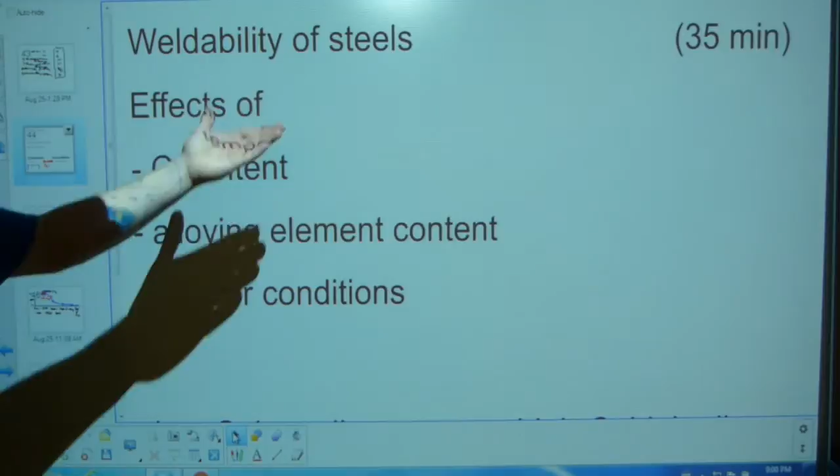In this video I will briefly review the major factors that affect the weldability of steels. I said briefly, even though it's more than half an hour, a little bit of video. Thank you very much in advance for your patience. I will make your time worthwhile here, okay?

I've got some interesting insight here to share on the weldability of steels that will save you a lot of headaches, okay? However, this is neither a 4-year degree in metallurgy nor a course of any kind. This is just a single half an hour.

To make the most sense out of this half an hour, I'm going to use two things here. One is standard symbols from the periodic table of elements that are the same everywhere worldwide, and I'm going to refer to some steel numbering system, and it's North American. However, wherever you are on Earth, whether you're familiar with the Russian steel numbering system, or the Swedish, or the British, the French, the German, the Japanese, or the Chinese, or Australian, it doesn't matter, because once you're familiar with one, you can fairly easily relate to this North American system. And I'm just going to use a handful of those terms, okay, and it's going to make sense.

And I have a table and a half of steel samples set up over there that we can look at and spend 5 minutes on, just to make sure we're all on the same page, okay? So, as the title suggests, let's get started.

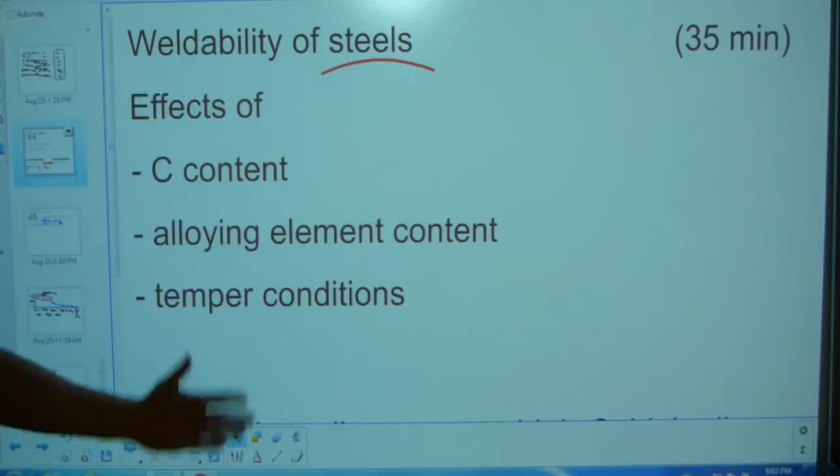Second, what do I mean by weldability? Aren't all steels equally weldable? Absolutely not. There are hundreds of steels out there in the world, and there could be, I don't know, 500-800 different types, and just because you welded one out of these hundreds, the other 799's weldability is completely different from the one that you actually welded.

What you probably welded, if you welded in high school or you weld at work, is ASTM A36 structural steel, or in SAE terminology it's a 1025 mild steel. Like I said, I'm using North American commercial terminology. SAE is Society of Automotive Engineers, and AISI is American Iron and Steel Institute. They developed this terminology in the 1930s and 40s and standardized it, so that's what I'm using. I will walk you through it in a sec.

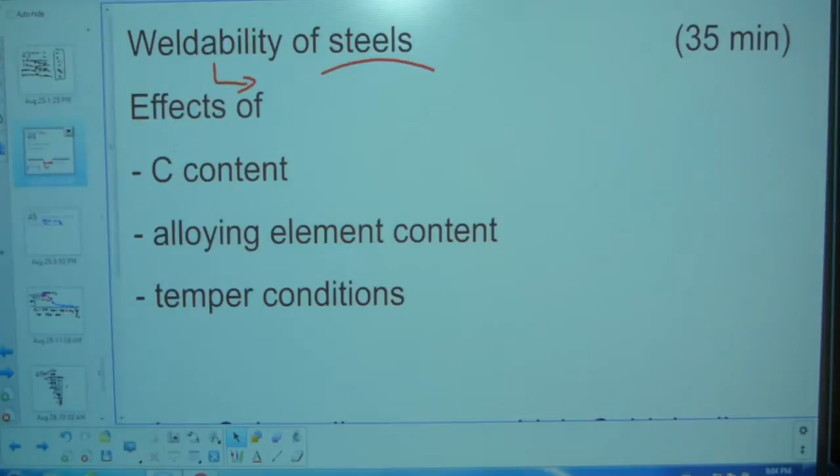So in one word, yeah, all steels have different weldability, and in one word, what's meant by weldability is strength. The strength of the weld being produced. Is the weld as strong as the materials being joined together? That's what's meant by weldability. In some cases, the weld is even stronger than the metals being joined together, depending on the skill of the welder and the electrodes and this and that, okay?

And in some cases, likewise, the strength of the weld that joins the material together is worse than the materials being joined together. Now, that's not necessarily a bad thing. If a weld is for cosmetic purposes only, it's still a valid reason. If there are no great stresses or loads placed on the welded part, a cosmetic weld can work fantastically well, such as holding oil in an oil pan. Oil isn't too hot and it can work fantastically well if it's a cosmetic weld, like I said. But what's meant by weldability is how strong is it in comparison to the base metals welded together? Alright, so that's what weldability is.

So that also means that in this video I'm not discussing welding technique or welding skills or how to choose the right electrode, how to set up the volts and amps on your welder, or how to apply the shielding gases. That's the technique of welding, and this is the material science or property of material weldability. Alright, so this is only going to be about weldability.

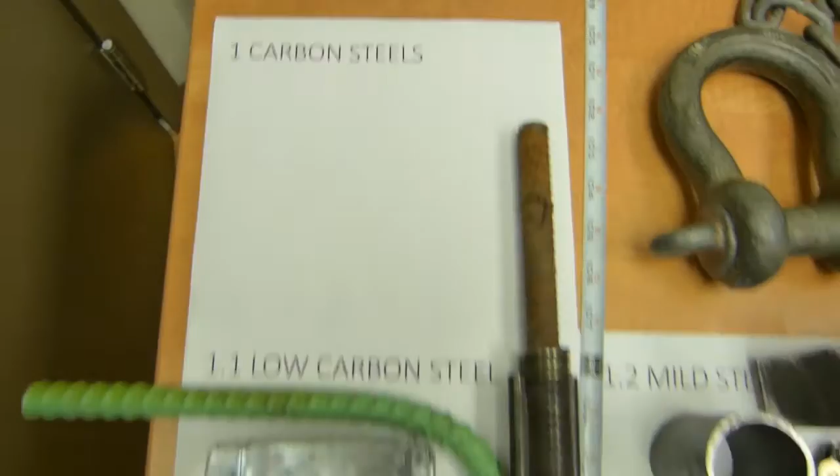So, before we get going with carbon content, let me show you this terminology related setup here. Come on off the tripod and we'll walk over there. Yonder corner in the classroom, we've got this setup here. Carbon steels is the first group here, and in this group there are low carbon steels, mild steels or structural steels, medium carbon steels, and high carbon steels.

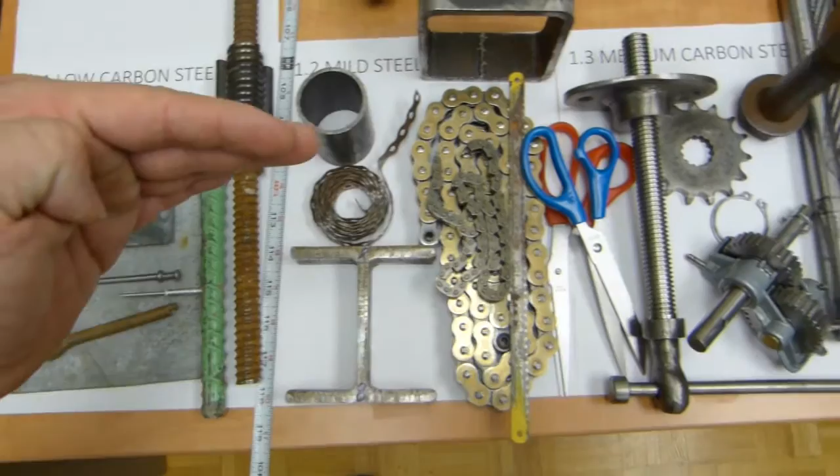That's what it says, high carbon steels. In these groups you can see what kind of items are being made of this stuff. In these groups, carbon content evenly and successively increases. So starting at very nearly zero carbon, going up to about 1.2%.

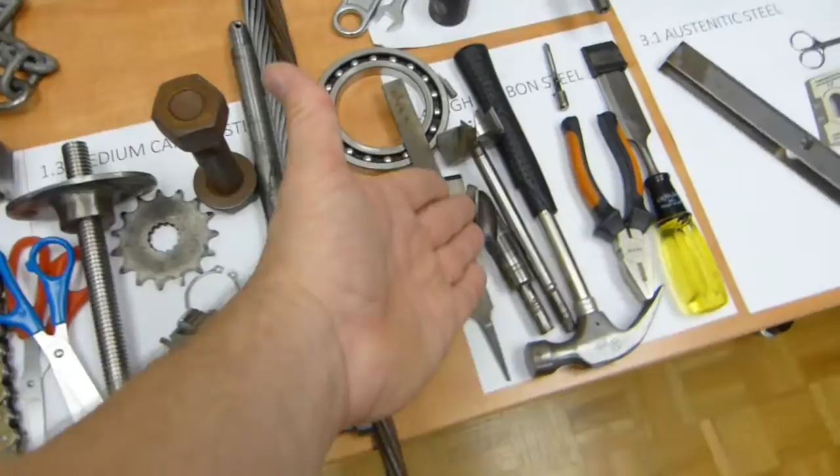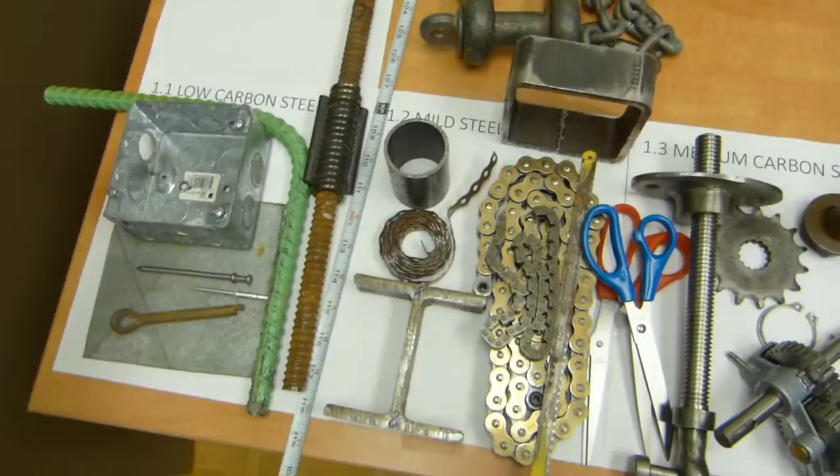Technically, anything up to 2.1% carbon content is defined as steel, but past 1.2% commercially nobody makes anything. Okay, between 1.2 and 2.1%. So that's where the high carbon steels pretty much top out. So the difference, other than the difference in material properties of the steels that this increasing carbon content from 0 to 1.2% produces, is quite dramatic.

Here the lowest carbon steels are meant to be bendable and flexible, and you can make these boxes that you bend the metal and crimp it back and it doesn't break, and you can work it with tin snips and hand tools, and these parts are made to be bent without cracking out where they are being bent, and they work fantastically well for that purpose. These steels here, hollow structural steels, channels, L's, pipes, I-beams, everything, you can't cut it with a tin snip anymore. You need power tools for this one, really. You can try a hacksaw, but good luck with that. So these are stronger as they have more carbon content in them.

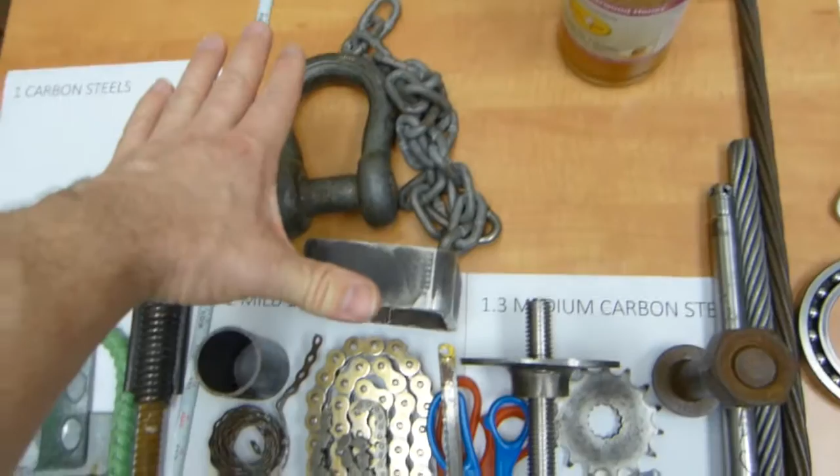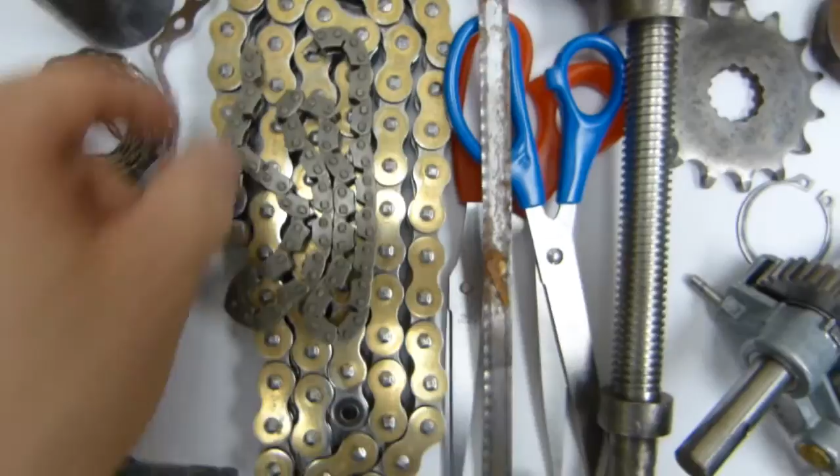They are still welded, such as the welded chain link here, obviously welded in the middle, but they are also bendable enough so they can put a tight radius turn on this one, and it still doesn't crack out where it's being bent. Now that's the cheap chain. There are also alloy chains, made out of alloy steel, but they start at this carbon content pretty much. And they can make this other kind of chain known as roller chain with these pressed plates and pins together.

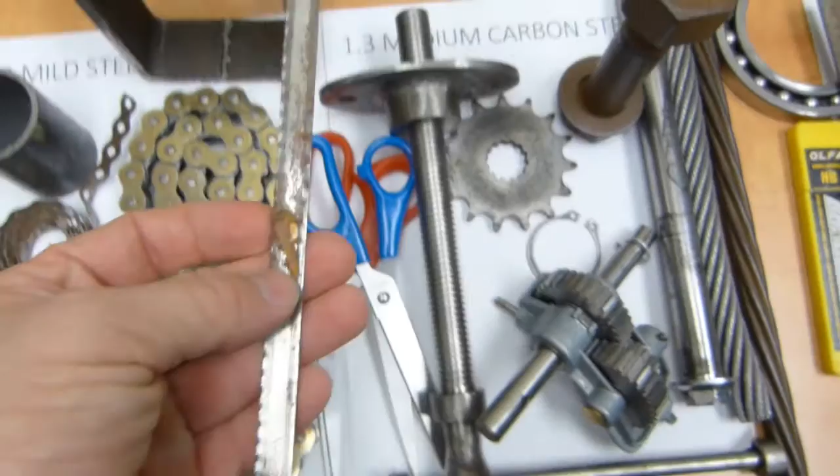You know, these need power tools to work on, and these steels are stronger, that's why they are structural, than these. This is sheet metal ductwork for the overhead air conditioning, that kind of stuff, and this is for gutters and that kind of stuff. It's also galvanized. Over here, as carbon content increases, that's a hacksaw blade, but bandsaw blades are in principle similar enough to hacksaw blades. These blades are welded together. These can be welded. You can see the weld in it there at the bottom.

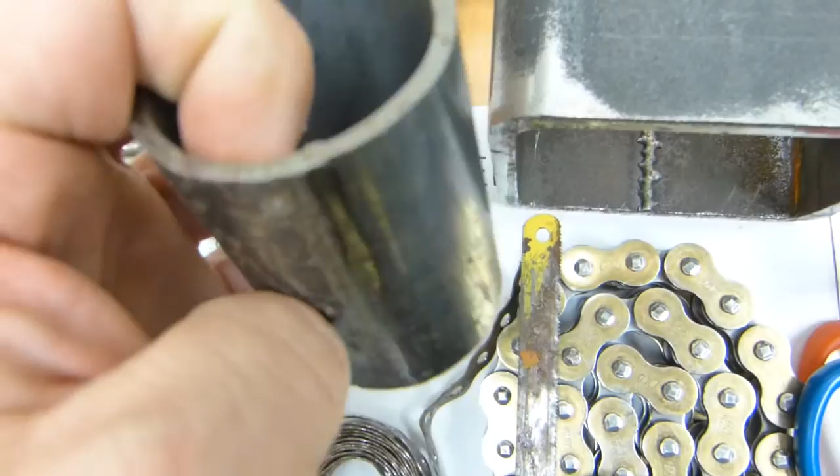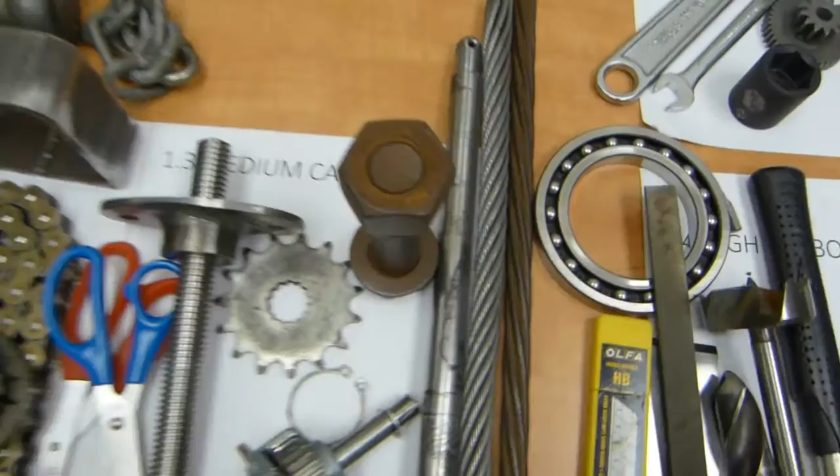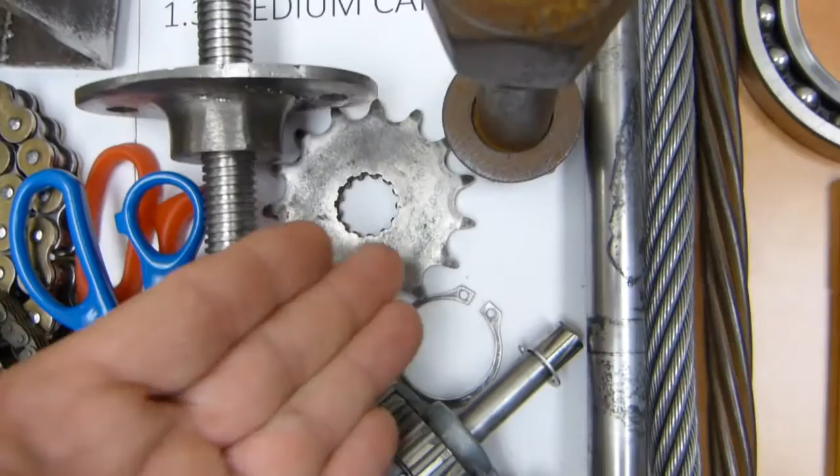Same for the pipes there. It's an automated welding process. There you can see the bluing and discoloration in the heat affected zone somewhat. So that's mild steel there, fantastically weldable. On these things you don't find any evidence of welding anymore, you see. What's made out of medium carbon steels is threaded items, whether it's this one that is part of a vise or bolts, threaded or teethed items, with teeth on a sprocket or teeth on a gear, these kind of things. And of course shafts and axles and also wire rope, wire for the wire rope.

As carbon content increases, strength of the parts increases. Shafts and wire ropes are a lot stronger than beams and a lot stronger than the cotter pin. Or the wire the pop rivet is made with is a lot weaker than the wire rope is made out of, even if the wire is the same diameter. It's a lot stronger wire than the wire used in a wire nail.

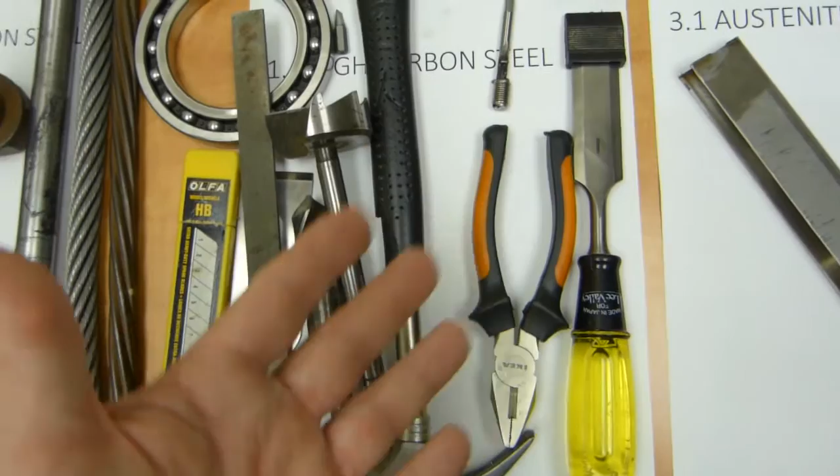Okay, high carbon steels. As the carbon content increases, you see strength increases and hardness increases. These items here hold an edge and they should be dimensionally stable, whereas these can stretch and flex and elongate, and beams can sag. If a chisel sags or bends, it's a problem. Whereas beam sag is typically calculated or allowed, or pipes or rebar should sway with a building in an earthquake. If a longer drill bit twists like so, it's not really a functioning drill bit, you see.

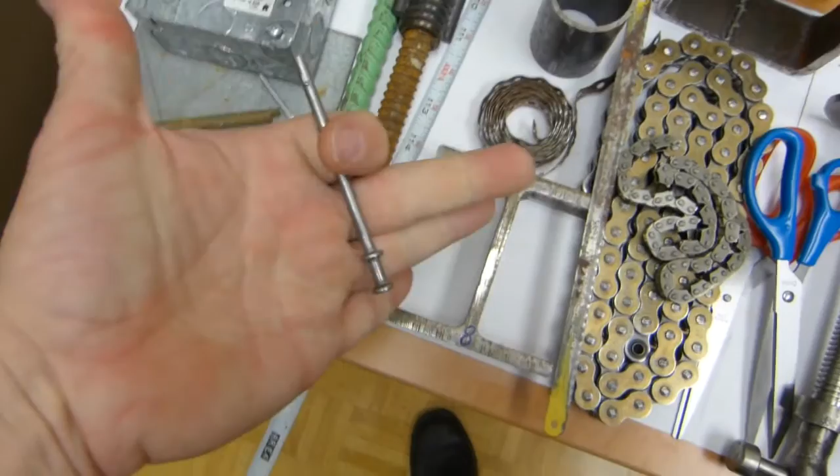These, as carbon content goes up in high carbon steels, are becoming more rigid. That enables these items to hold an edge. A chisel has an edge, a tap and die set has an edge, the wire cutter part on a pair of pliers has an edge. Okay, hammers don't have an edge, but they are dimensionally stable and they don't deform. Drill bits have an edge and a point, whereas the nail point, or even if you sharpen or make a knife out of this rebar material, it's going to have an edge, but it's not going to hold.

The nail can be blunted really easily with 1 or 2 strokes of a hardened or high carbon steel hammerhead, you see. So not only do they have an edge or a point, such as a drill point, but they also hold that edge or drill point, whereas these don't, even if you make one on them.

Same way, hand files, razor blades, knife blades, plane blades, screwdriver bits, they hold their shape, they're dimensionally stable. That's what I mean. So this is the pattern that's important throughout these groups. Carbon content up, strength up, edge holding ability up, resistance to wear up.

You see shafts and axles, you can easily file a nail, not so easily an axle. And weldability also decreases to some degree, and after that not so much. And I'll explain it in a sec.

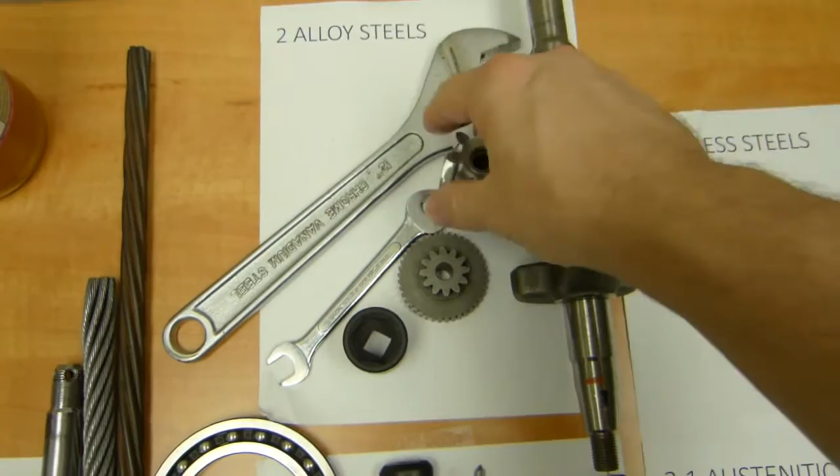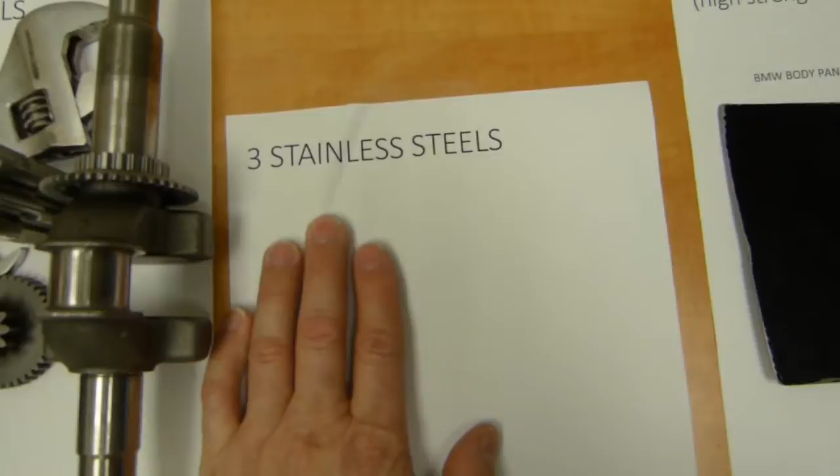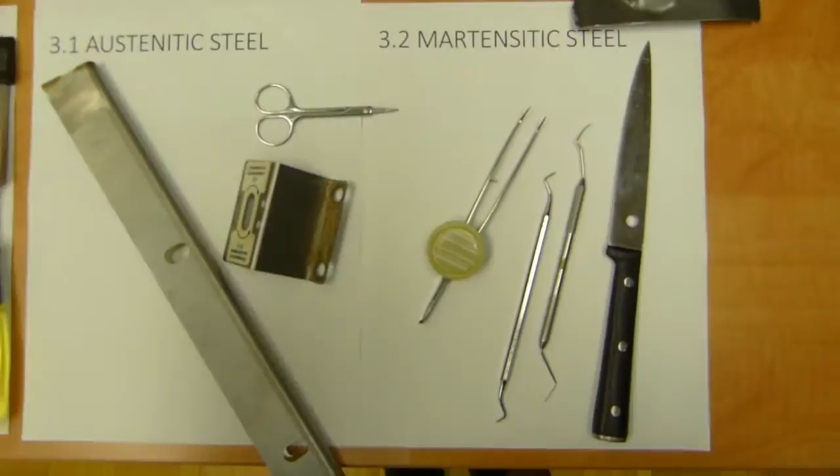Another internationally used term is stainless steel, and out of the stainless steel groups, I'm only going to use 2, austenitic and martensitic, because the discussion will be about austenite and martensite. Austenite and martensite are crystalline structures of steel, and it's coming up later. From those crystal structures, the groups got their names.

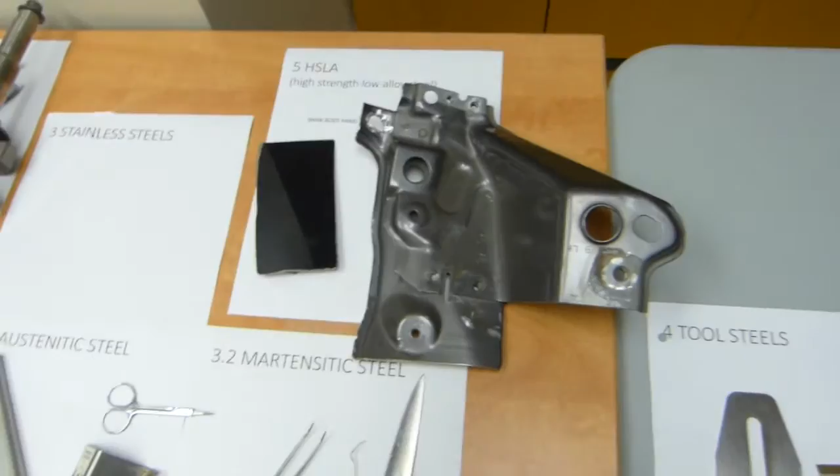The next group to be featured is high strength low alloy steels: auto body panels and structures of cars and the Alaskan pipeline. There's going to be a story on the Alaskan pipeline here with high strength low alloy steel. The last group is tool steels. Without any further distinction, everything is just tool steel, whether it's for hand powered and hand driven use or a rotating electrical power cutter head at a high heat and high speed. Everything is just tool steel without any further discussion on that one.

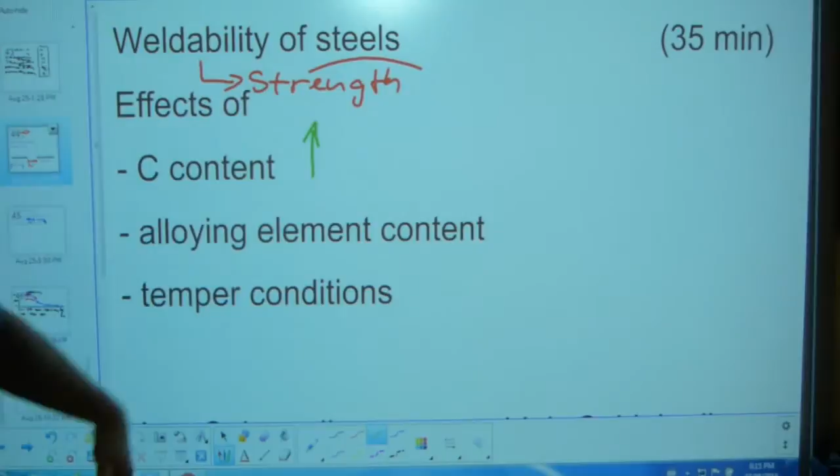So these are just a handful of terms that I'm going to use for describing the first major factor and how it affects weldability. And very simply, as carbon content goes up, weldability goes down quite drastically. Just as minute amounts of carbon increase the strength and hardness of the steel really spectacularly, as carbon content goes up, weldability goes down just as fast. So it's worse with high carbon content, and weldability is better with low carbon content, such as the rebars and that kind of stuff.

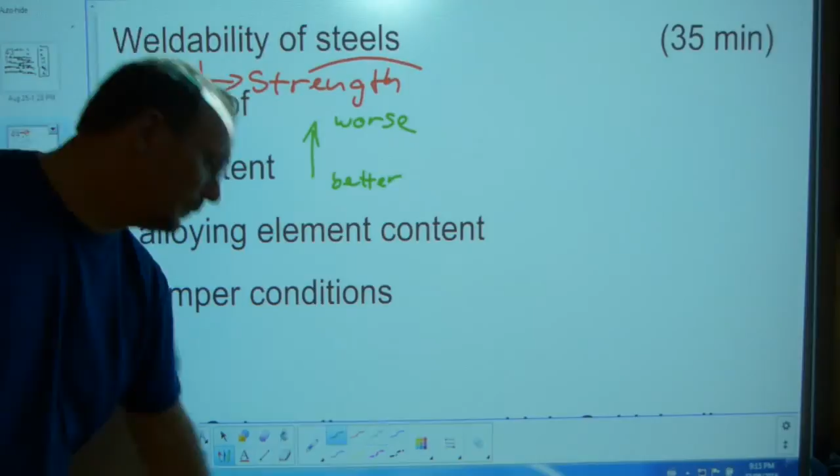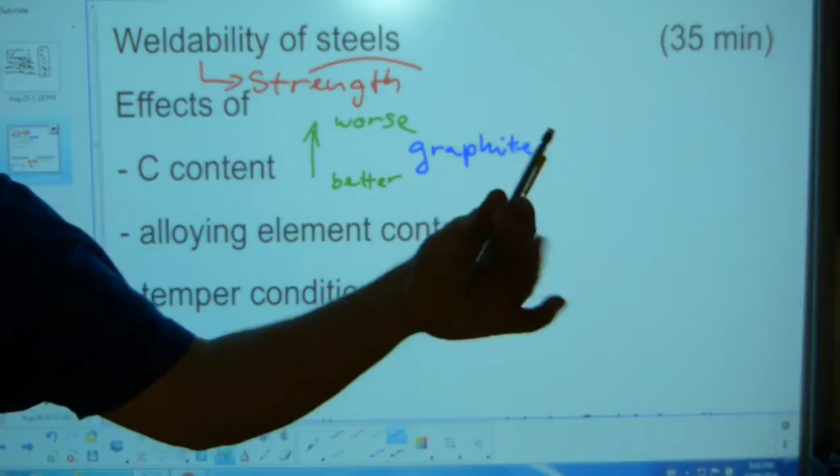Okay, the reason for this, in one word, is, let's see, blue, I'm going to spell it here neatly, graphite. That's why I have a pencil here. See, graphite is carbon. These are carbon steels. Graphite is an extremely soft form of carbon. That's what makes it a fantastic material to write with, because it slips, and as it slips and shears, it leaves a nice and even track on the paper. Fantastic for working, fantastic material for strengthening the steels, but it has some benefits as well as disadvantages.

It's the softest form of carbon that's out there. And because carbon is allotropic, there are different forms of carbon. The softest is graphite, the next softest is charcoal, and from charcoal we go to coal, and the hardest one is diamond. So unfortunately, out of carbon steels, diamonds don't drop out and spread on the floor and sprinkle.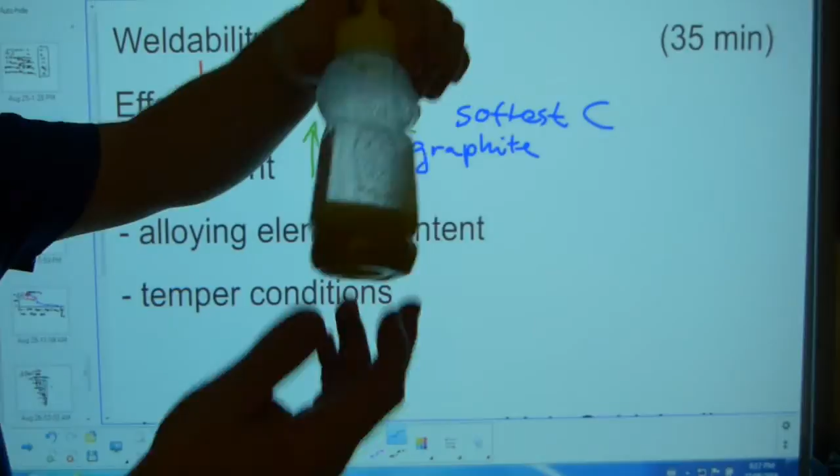Graphite will precipitate out of high carbon steels. The more carbon the steel has, the more graphite it precipitates out as soon as the heat of the welding torch hits it, or the welding process. And that precipitation is very similar to this honey stuff. You see, this used to be liquid honey, and over time, just standing still at room temperature, the grains of sugar crystallize out of it and it becomes this solid blob.

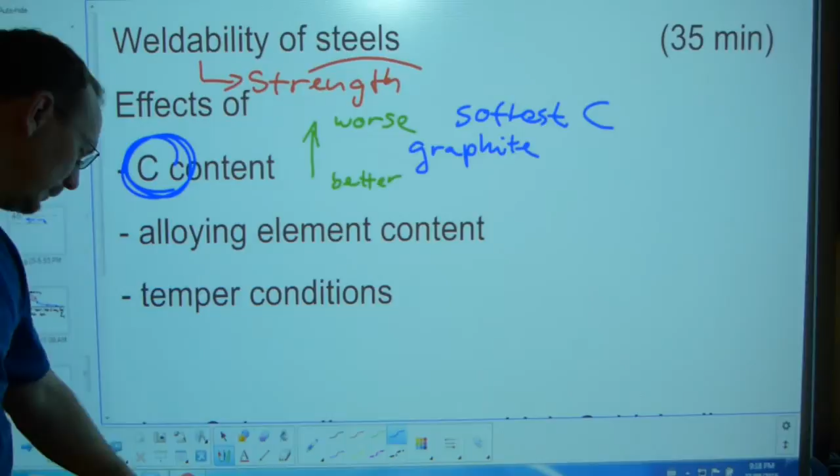Now, the same thing happens with the graphite content or carbon content in carbon steels. Due to the heat of the welding process, the graphite begins to run together, clump together, form individual little droplets, and those droplets join hands and form a layer. That layer is like an ice rink or skating rink. That's going to provide a slip surface along which the material will fail. This graphite layer forms in the heat affected zones, and I have a picture of it. It just so happens that, let's see, yeah, that picture. It just so happens, maybe I'll stand over here.

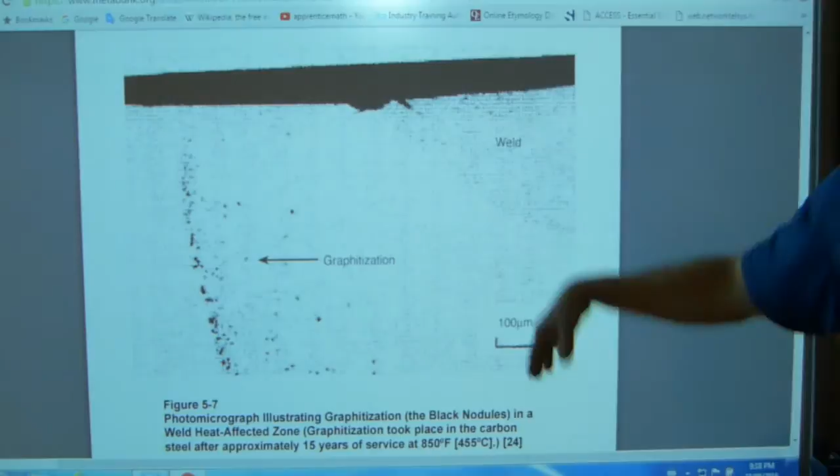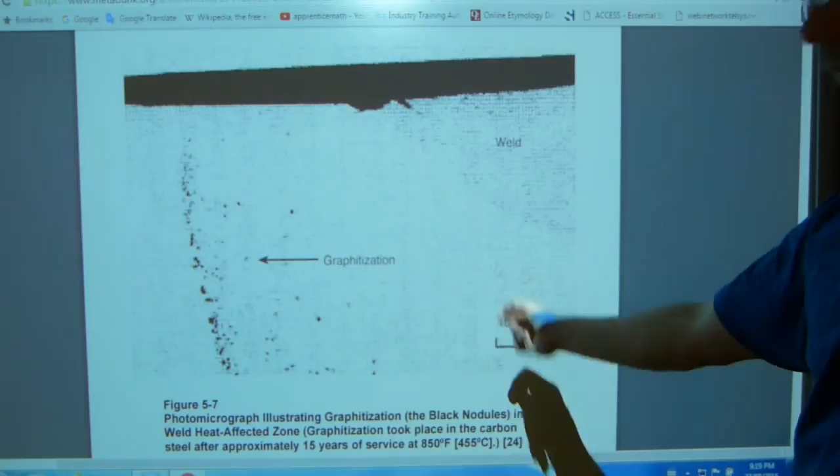This is a book PDF from the British Stainless Steel Association or some such thing. I'll show you where it's from at the end of the video. So this here, it says weld. It's a little grainy, but you can make sense of it. It's a real photograph from a real metallurgy book, done on a metallurgical microscope after etching and coloring it and preparing it, okay? And it says 100 micrometers there for scale. So this is for real, coming from a real metallurgist. I'm not just inventing this stuff, you know.

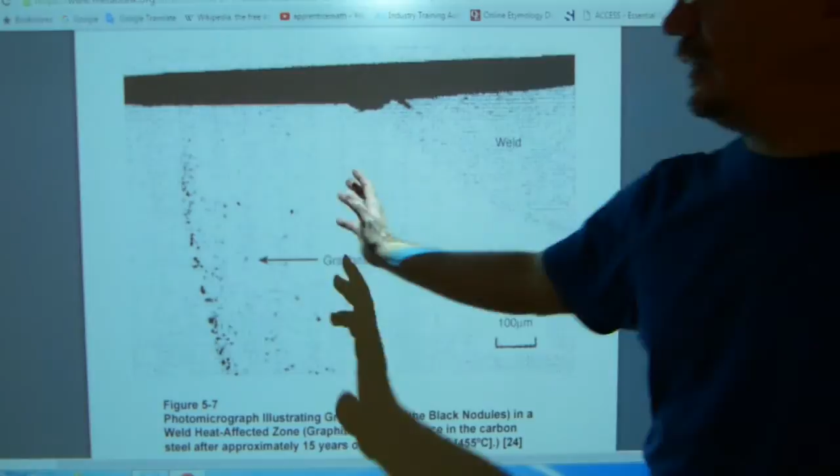So this is where the weld fusion zone ends. This is the weld deposited, and that's the base material, and this is the fusion zone here, where the weld fused together. The heat affected zone is further out from the edge of the welded area, and within this heat affected zone you can see these black specks everywhere, and what's written here is graphitization.

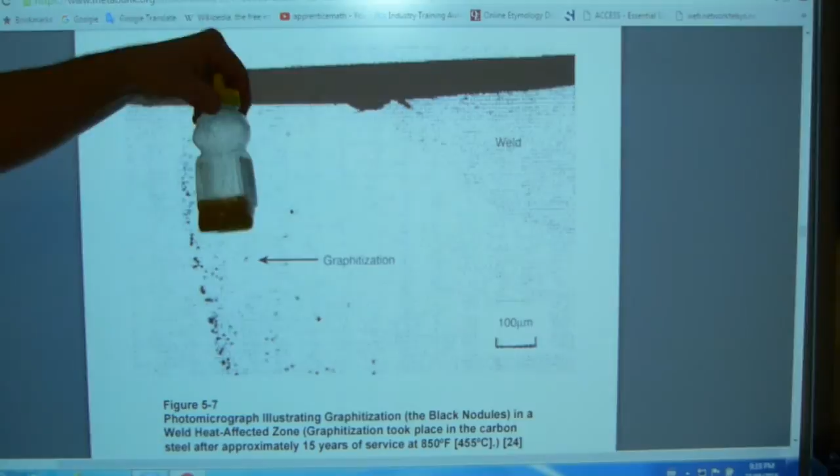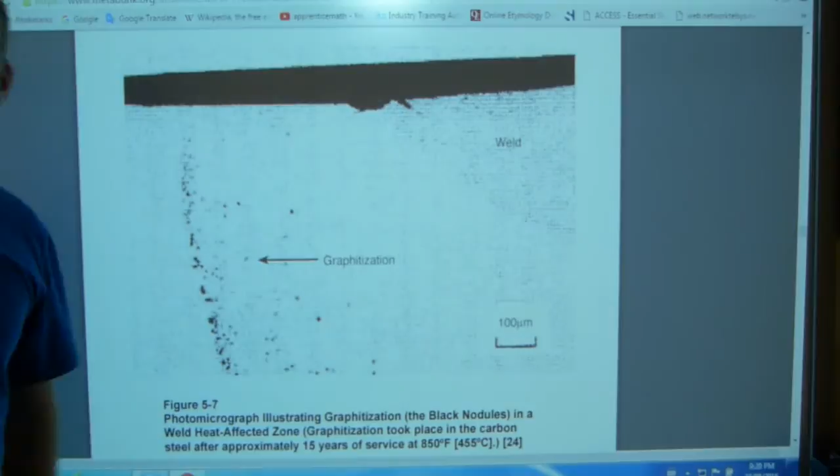See, that's what happens with this carbon content, just like with the honey, where the sugar originally is evenly distributed and dispersed everywhere in the liquid honey. Likewise, in the liquid iron, the carbon content is nice and evenly distributed. Then it solidifies as is, and it works fantastically well as such. But as soon as the welding torch hits it, the carbon begins to run together, and this one just happens at room temperature.

And the sugars clump together, first in just one corner and another corner and another one, and then it becomes a solid blob, exactly the same way. One blob of graphite here, another blob there, and they also migrate towards each other, and eventually they're going to form this layer. It's like butter. You know, that's how graphite works. It just breaks and fails here. Okay, I hope that makes sense.

The other two will be faster, because the first factor here affects the second one, and the first and second will transfer to the third one. So we're picking up pace here now.

Why people put carbon into steel is to, again, make steel stronger and make steel harder. This is actually one of the greatest discoveries of the Industrial Revolution, to make steels predictably strong or predictably hard, not just any random alchemist experimenting, or the village blacksmith hoping it will somewhat work out. So a precisely measured and controlled amount of nice, pure, clean carbon that's uniformly distributed in a matrix of iron and carbon makes carbon steel. The village blacksmith didn't have enough heat to liquefy steel. All they had was a somewhat red, spongy blob that they had to hammer, and that's all a blacksmith could do. So stronger and harder, and like I mentioned with the drill bits and the chisels, also more resistant to wear.

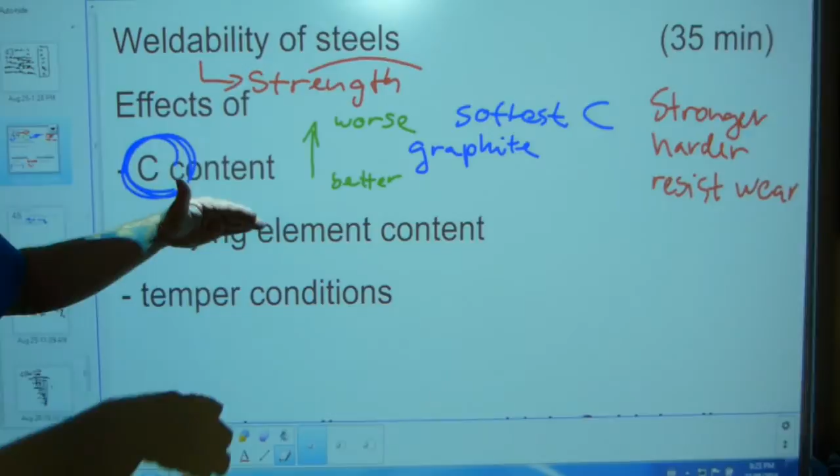Okay, that's why they add carbon to steels, not to make weldability worse and enjoy precipitating graphite, but to make steel stronger and harder. So the pattern continues to cast irons. Cast irons have 2.5–3.5% carbon in them. By the time you get to white cast irons, the weldability is really in the miserable range. So it starts out as pretty good and even excellent, and then it goes downhill to the negligible. But again, cosmetic welds can work fantastically well.

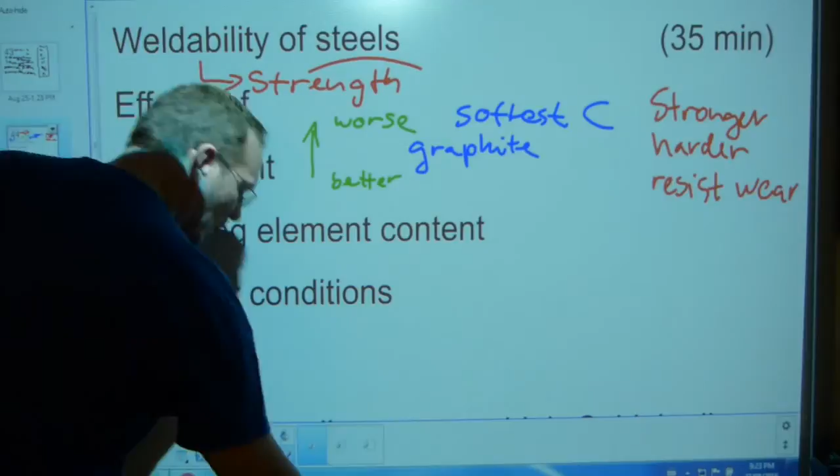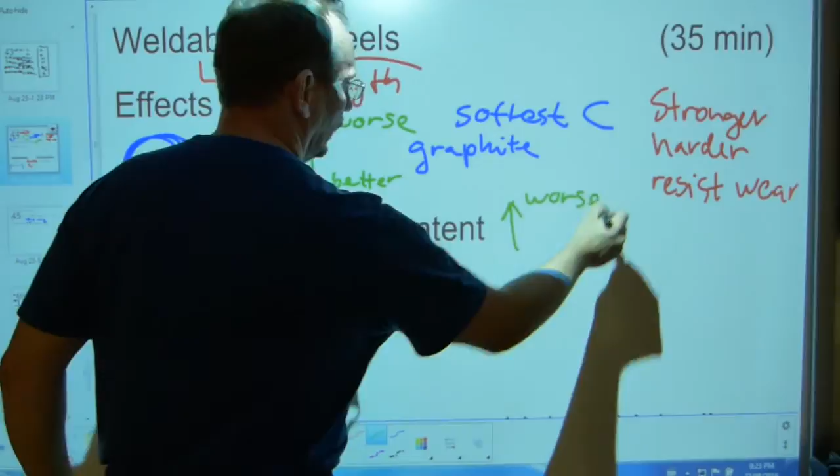So the next one is alloying element content, and it's exactly the same in its effect as carbon content. As the alloying element quantity rises, the weldability goes down. So with higher alloying element content, the weldability is worse, and with lower it is better. Same stuff, but the reason for it is different from graphite. In one word, and it's related to carbon content: carbides. Carbides. I'm going to write it here.

Carbides are a form of carbon that's extremely hard and brittle. That makes tools and tool steels so hard and brittle that if you have a chisel's edge, you can lose a chunk out of it. With high carbon and high alloying element content, if it's not tempered, and this is coming up later, if it's not softened after being quenched and hardened, then these super hard carbides will stay in it, and at the slightest shock load, whether it's machining metal or hitting a knot in the wood at high speed, chunks will fly out of it. It's so brittle. So that's how carbides behave. Now these carbides are compounds of carbon and a metal.

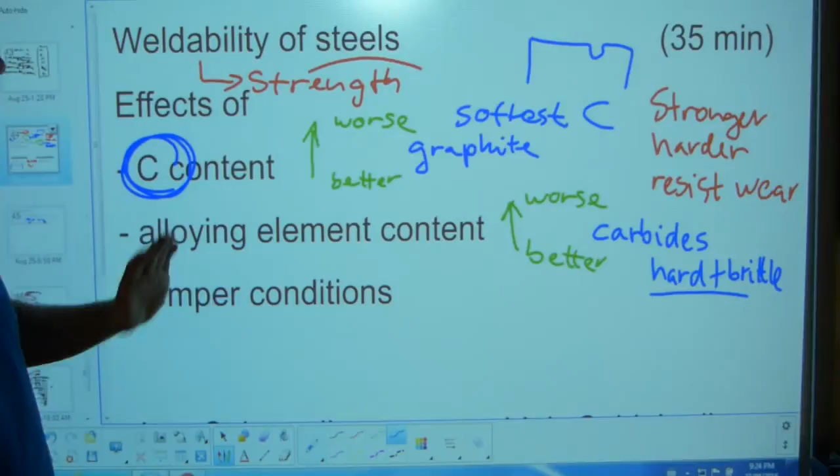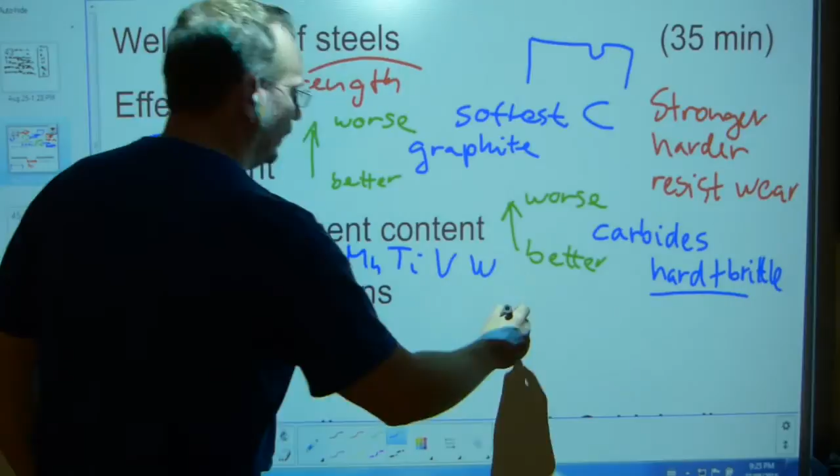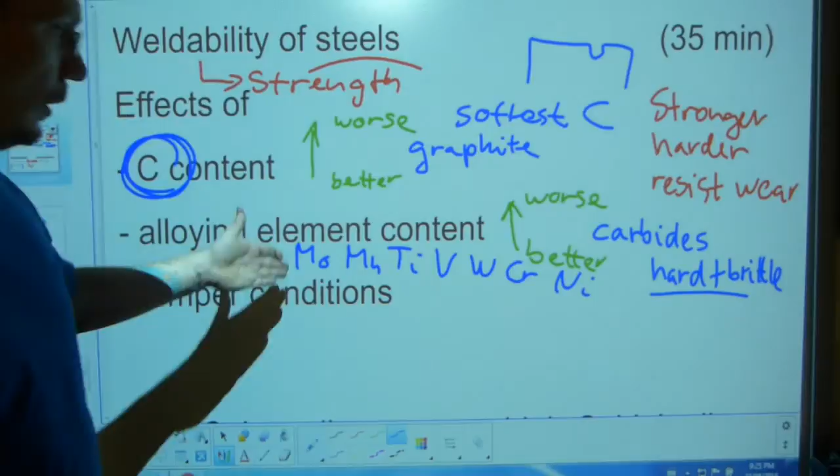The metal is the alloying metal in the alloy steels. So if it's a molybdenum steel or a manganese steel or a titanium steel, a vanadium steel, a tungsten steel, a chromium steel, a nickel steel, you get the idea. Whatever metal is the main alloying element, it could be two, or it could be a ternary or a binary alloy. So if it's molybdenum, it makes molybdenum carbide, tungsten carbide, vanadium carbide, chromium carbide. You get the idea.

These carbides are so hard and so brittle that they make weldability really bad. After being welded, these carbides need to be softened. They do dissolve with heat treatment, namely tempering or normalizing or spheroidizing or process annealing or one of these metallurgical processes. That's how carbides can dissolve back into the matrix instead of clumping together and making the tools brittle and pretty much useless for practical purposes.

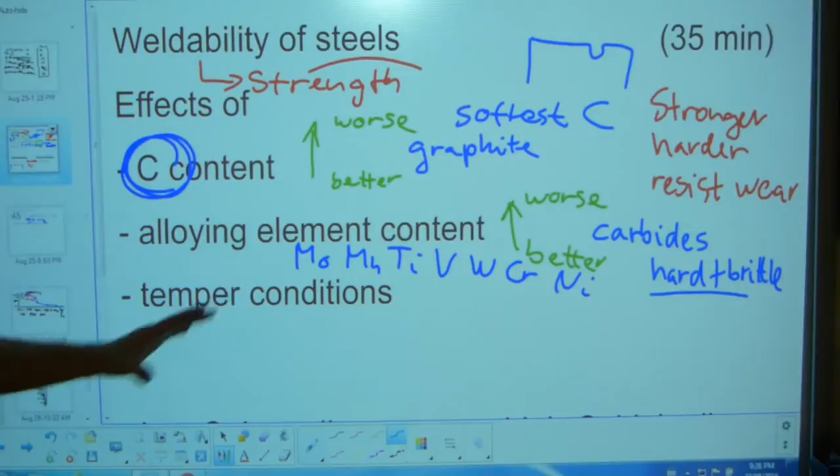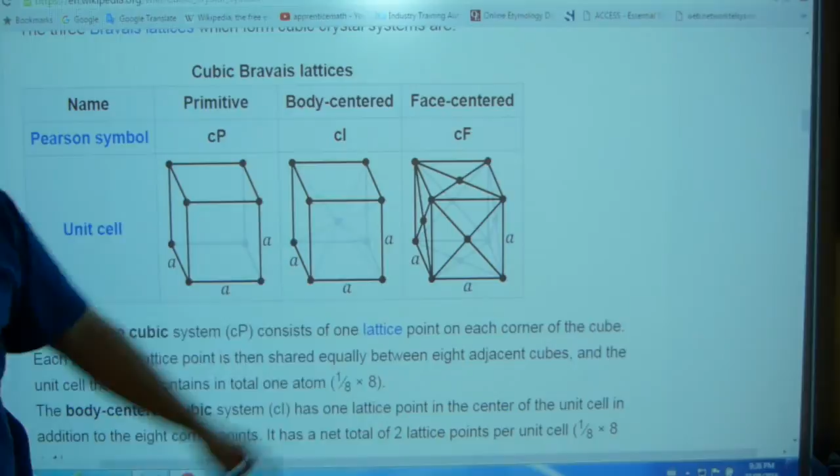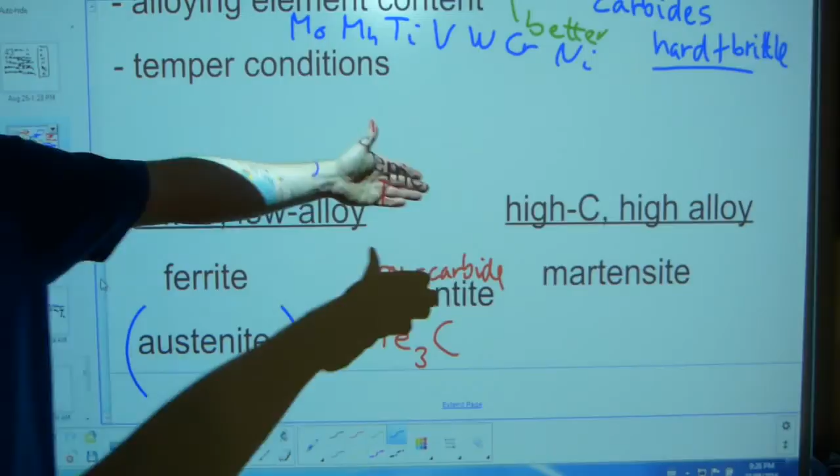Last one is temper conditions, and temper conditions need a little bit of explanation on these crystal lattices that are over here. Austenite is face-centered cubic, and martensite is body-centered cubic. Austenite here, martensite there. Low carbon, low alloy steels, as they cool and solidify from liquid state, they form ferrites and austenites. When you have high carbon or high alloy content steel, as it solidifies, especially when it's quenched, but even at lower rates of cooling, it produces a lot of martensite and some austenite and very little ferrite.

These are very soft forms of steel, or very soft compounds of iron and carbon. Martensite is hard and brittle again. Besides the crystal lattice that makes it hard and brittle, what makes it hard and brittle is cementite. Cementite is iron carbide, Fe3C. All of these are synonyms, so iron carbide, cementite. So when you have a lot of carbon in a steel, it makes a lot of martensite, some cementite, and very little austenite and ferrite. When you have just low carbons, they only make ferrite and austenite.

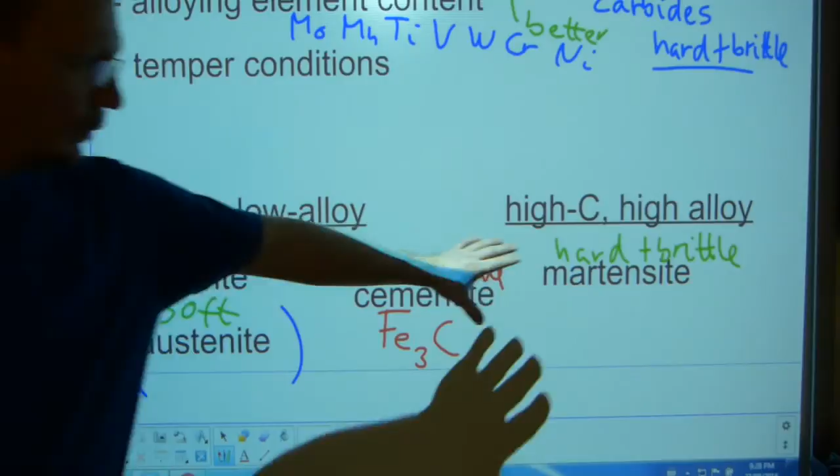All right. What happens with this martensite and with this cementite that's iron carbide, so that's why it relates to the previous story of carbides, is that you have to anneal it or temper it, or some kind of heat treatment has to be done on it to soften them. But here is the austenite's revenge. Austenite is face-centered cubic, and austenite leaks carbon. And as it leaks carbon out, that carbon makes iron carbide compound with the existing iron, and that makes martensite. Even though some of these are being softened and dissolved into ferrite and dissolved carbon, austenite releases a lot more carbon that makes iron carbide than the amount of existing iron carbide is being softened.

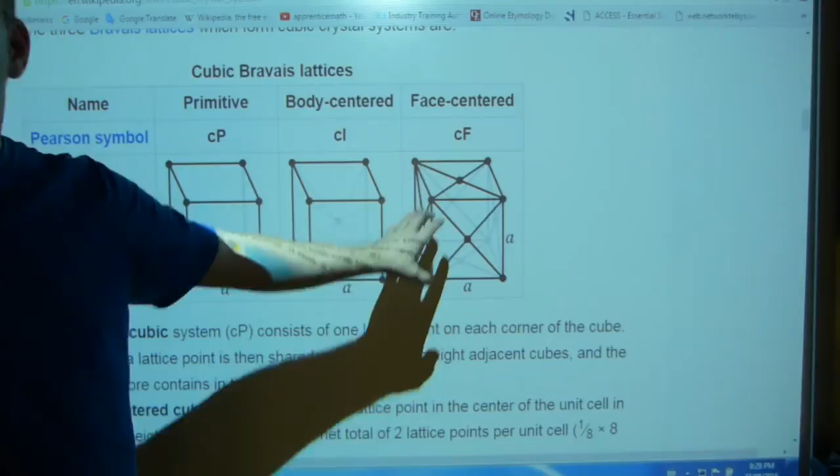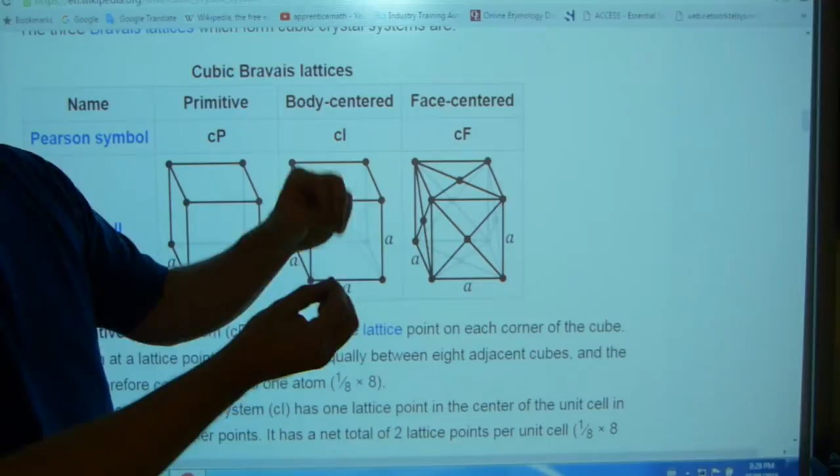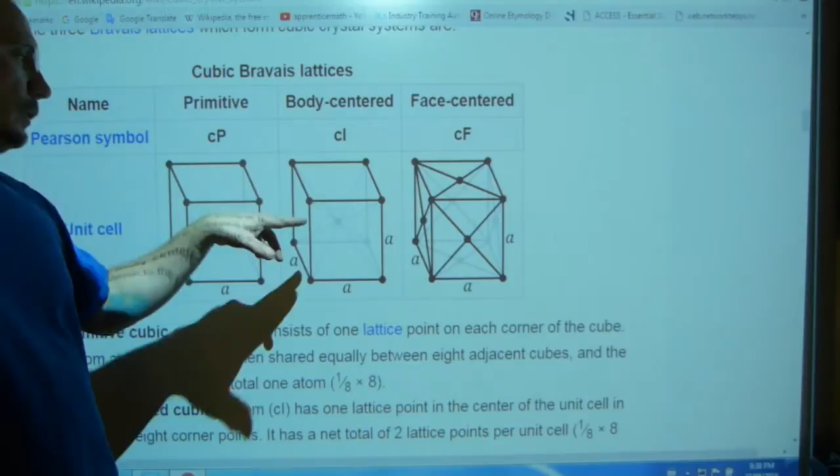The reason why austenite contains more carbon is visible here on this illustration. The atomic number of carbon is 6. Carbon atoms are small. The atomic number of iron is 26. The iron is a big atom with lots of protons, lots of neutrons, and a lot of electrons around it, 26 each. As carbon is a small guy, the ions sit on the corners of these cubes, crystal lattices, and the carbons can fit in between, you see. And they fit so fantastically well. Whereas martensites have ions sitting on the corner of the cube, even though martensite is technically a body-centered tetragonal, so it's a rectangular prism, close enough to a cube, okay? So on a martensite, one carbon sits in the middle of this thing, and in an austenite, one carbon sits on every face, so that's 6 carbons. So it contains a lot more carbon as an austenite.

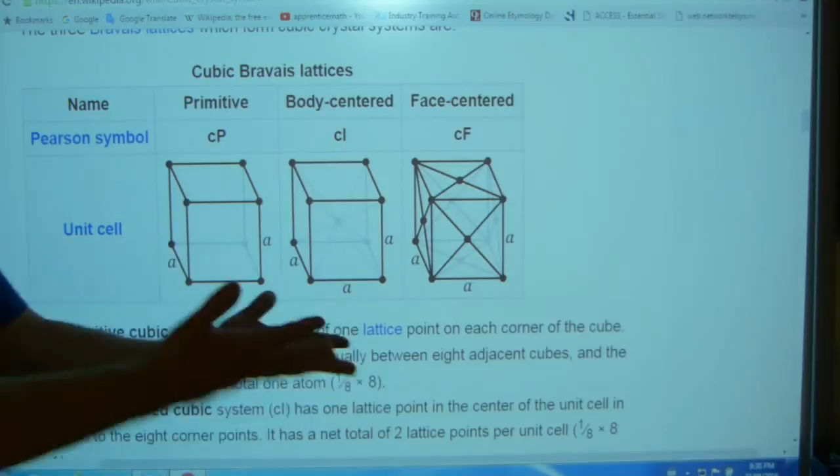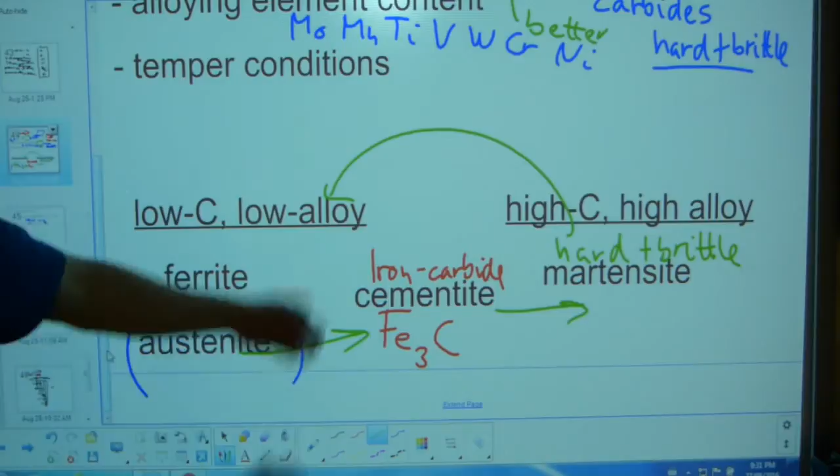So that carbon exits the austenite as it's being heat treated. You're expecting the martensite and the iron carbide to dissolve some of these carbides and soften, but it won't. The revenge of austenite comes right back in and will release more carbon that forms iron carbides than what's being softened by tempering and annealing and spheroidizing and any of these processes. They're all the same for now, this discussion. This is real. I didn't just invent it.

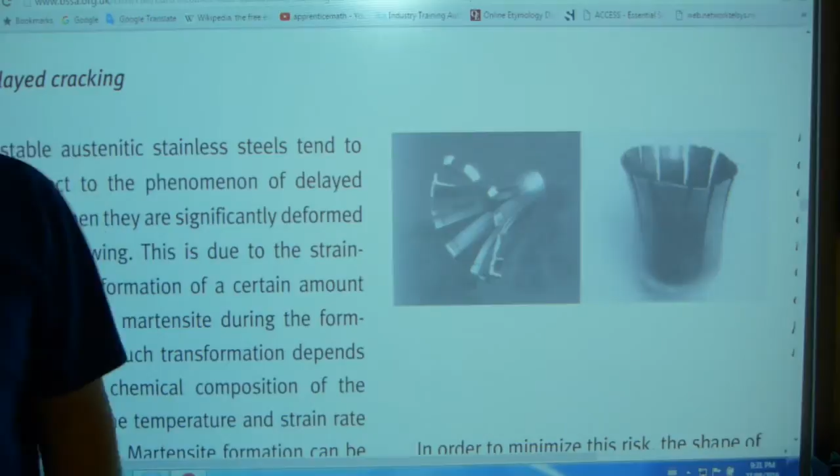Here is another reference: delayed cracking of unstable austenitic stainless steel. So this example is from stainless steel, where this cracking happens. This used to be a cup shape. It wasn't cut up into strips like this. This is not a decoration in a flower store. This used to be a solid cup that held liquid.

Not anymore. And it splits like this spectacularly because of the delayed transformation of the austenite. And this one says, instead of delayed transformation, it says delayed cracking. Same thing. You can read it, and I'll show you where this PDF is. And it happens during deep drawing. That's a cold metallurgical process done at room temperature, and it could take months to produce this result.

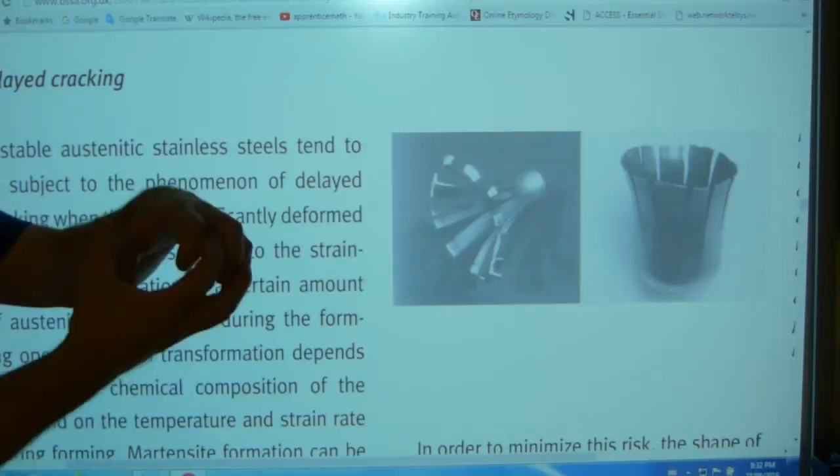But in welding, it can happen in 15 seconds as the heat of the torch hits the metal. The delayed transformation of the austenite starts, and as it changes crystal structure, the shape of it changes as well. It just cracks uncontrollably everywhere. So let me show you where the source documents came from.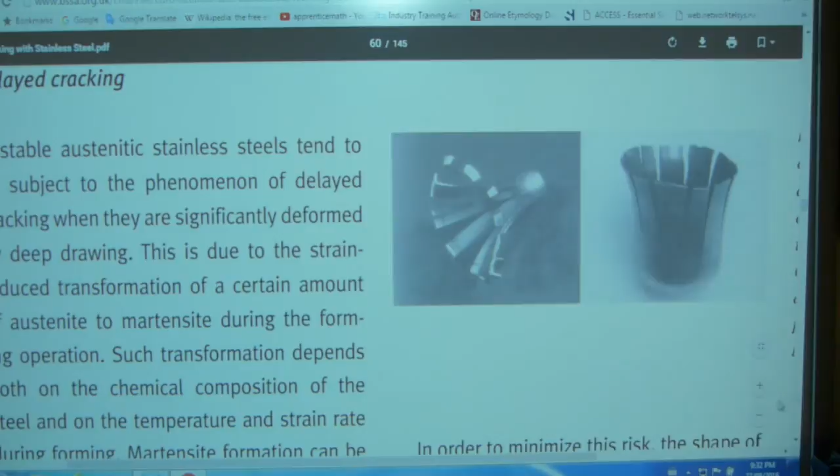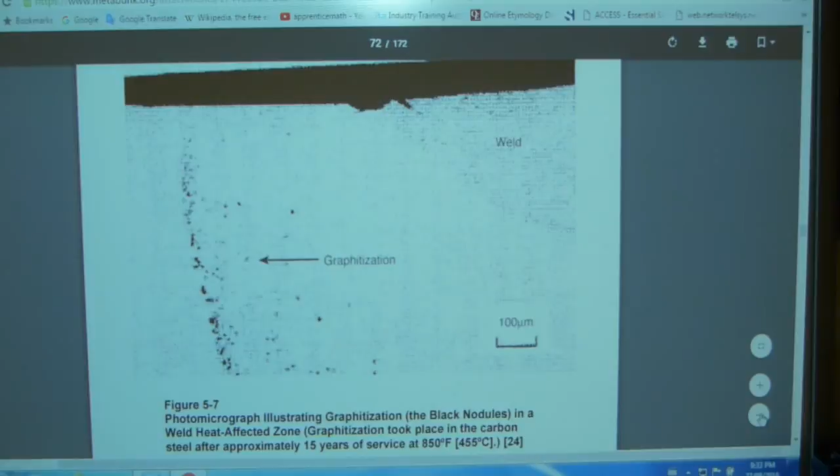I'm claiming fair use. I was just pointing at it and reviewing one thing out of it. And it is from the British Stainless Steel Association, www.bssa.org.uk, and this is the front page on it. The author is Pierre Jean, and that's how the front page looks. And on the previous one of this work, I can zoom out a little bit, and its author is up here. Oh, there, that's how it looks.

Electric Power Research Institute, Carbon Steel Handbook. You see, this stuff is real. Metallurgists and scientists research this stuff. And here is this notice that it doesn't need any copyrights, whatever. You can read it. And let me see, there's the author to it. Thank you very much. So going back to this one, we're basically done with this weldability thing.

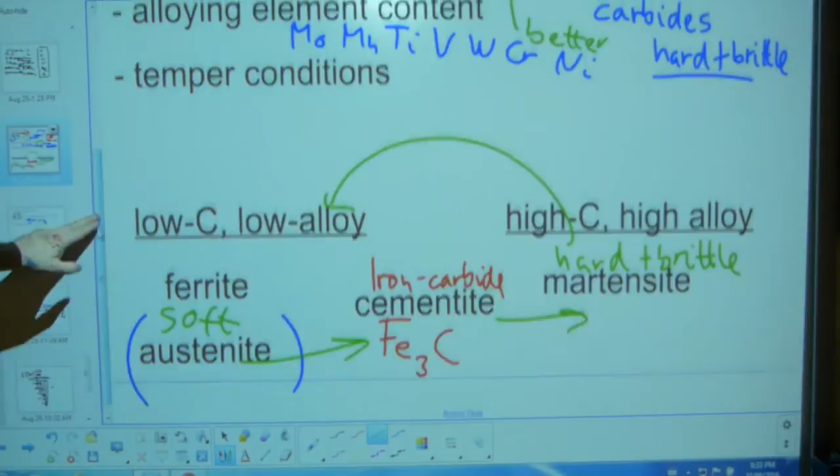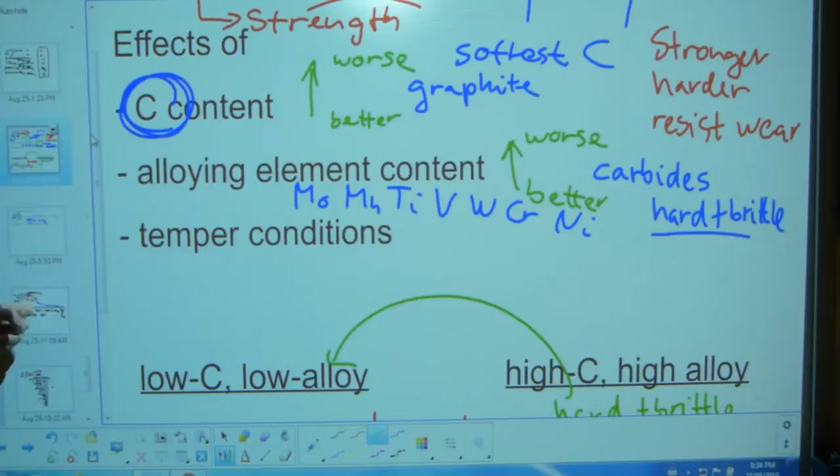This is how carbon and carbides and graphite and this temper and the existence of austenite affect weldability. To put it all together, I have them on a graph that looks like this. On the vertical axis, I just invented this. I have subjectively assigned very poor, bad, miserable, somewhat okay, good, better than good, excellent, so that these adjectives are on this side, and I have the steels listed on the horizontal axis. You see the carbon content going up, low to mild to medium to high carbon content, and there are some other steels. I'm going to explain those in a sec.

So low carbon steel, its weldability is better than good. In mild steel, it's even better. There's ASTM A36 structural steel, or AISI or SAE 1025 mild steel. Its weldability is probably the best from among all steels, all 800 of them, or as many as there are. It has 0.25% of carbon. As soon as carbon content hits 0.3%, it's definitely on the downhill in terms of weldability.

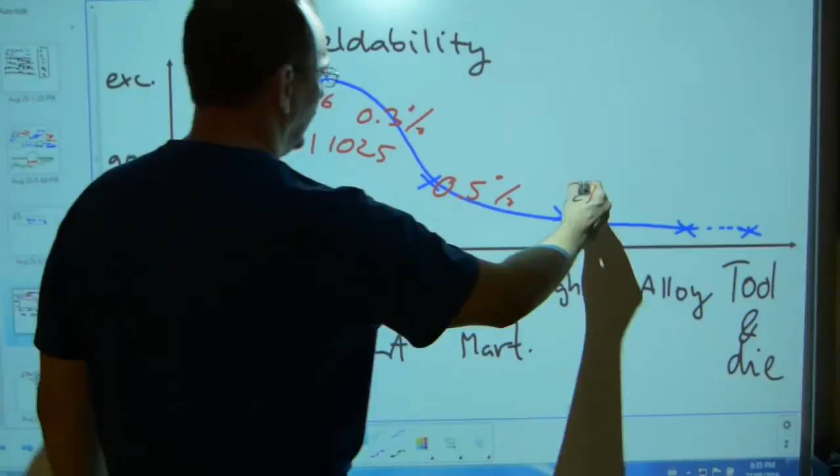And medium carbon steel, by the time you get to 0.5%, it's really downhill. By the time you get to 1%, weldability is really bad. And like I said, it continues. By the time you get to cast irons, 2.5%, 3.5%, it's really in the miserable range. So I hope that makes sense with carbon steels.

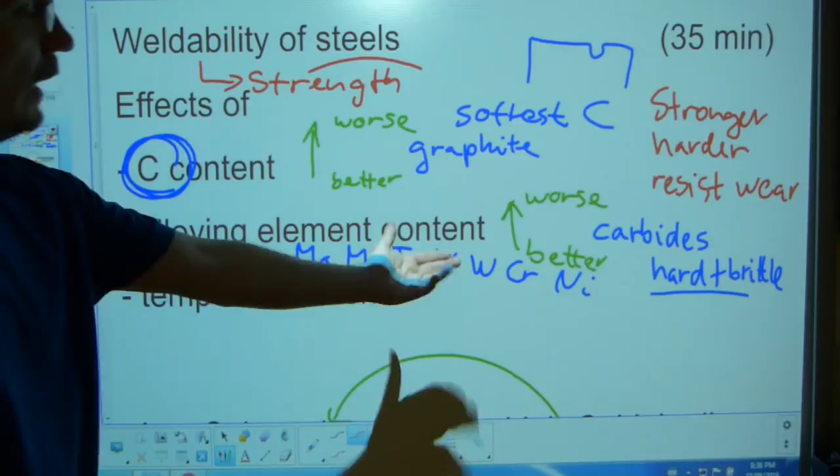Why alloy steels are over there is because some alloy steels contain low carbon amounts but high alloy amounts, and as a combined effect I place them in the neighborhood of high carbon steel in terms of weldability. Now some alloy steels are better than others, but as a group, just globally, all of them are there. Like I said in this video, I'm not analyzing how manganese alloy steels work harden after being welded and how they compare to chrome vanadium steels. That's another story for another video. That's why alloy steels are there.

The last on that line is tool and die steels. They are also there next to the alloy steels. Tool and die steels are weldable, and sometimes the weld is fairly strong. But instead of fair, they are on the bad side, because now I'm changing the definition of weldability a little bit. I'm also adding into the mix how easily the welder can get a result or get something done.

Okay, a cutter head, a titanium steel cutter head. It's made of tool and die steel. You not only have to weld it back together, that's strong enough, but you also have to restore the original geometry of the cutter head, you see. And it's a lot of work.

It's not necessarily the welder's work, but I just kind of included it into the concept of weldability a little bit. Because once you weld it back together, it has to be jigged up and properly welded so they are not shifted or otherwise distorted. So once distortion is controlled and it's geometrically as correct as it could be, then before it's sent out for machining, remachining actually, it has to go through some kind of process anneal.

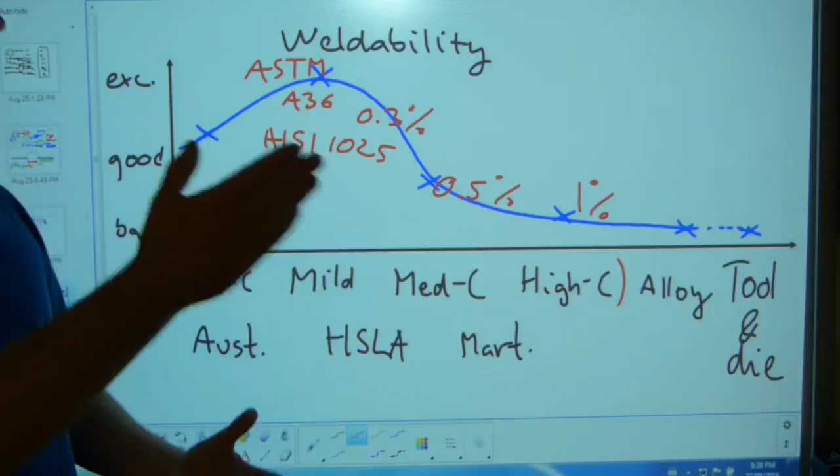A process anneal takes time and is often done at a third-party service provider, and then it goes to the machinist. That's another guy, and then from the machinist it comes back to heat treatment again, because it needs to be sharpened and honed. That's another process, and once it's done, it needs to be heat treated as well. So after it's being machined, it's quenched and tempered to the right surface hardness.

Often they need to be case hardened, where it's a differential hardening, where the outside of it and the cutting teeth have a different hardness than the shank of it. So that's why I placed tool and die steels over there. I'm not discriminating against tool and die steels. They are weldable, but it's a miserable affair. It's a long process.

This one here is austenitic stainless steel now. They have a low carbon content and they are fantastically well weldable, you see. Over here we have martensitic stainless steel. Some of them have a medium amount of carbon, some of them have high carbon, like over 1%, 1.2% for some of the high-end cutlery items and the scalpels and dentistry and

surgical items. Nobody welds a scalpel or a chef's knife back together because it doesn't work. Just like welding back a claw of a hammer doesn't work, because it holds only for one pull, and then the claw breaks off again due to the high carbon content and graphitization of the originally dissolved and evenly distributed carbon. So nobody welds a chef knife together or a claw hammer back. So that's why martensitic steels are kinda here and kinda here. Some of them are better weldable. Automotive mufflers are super weldable.

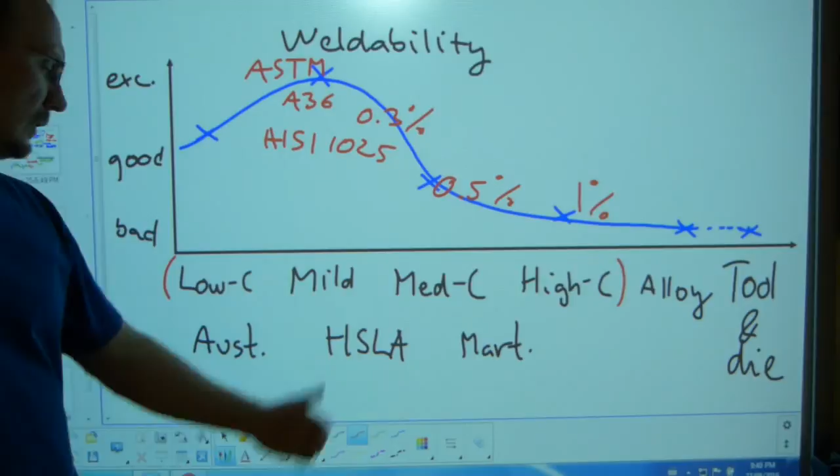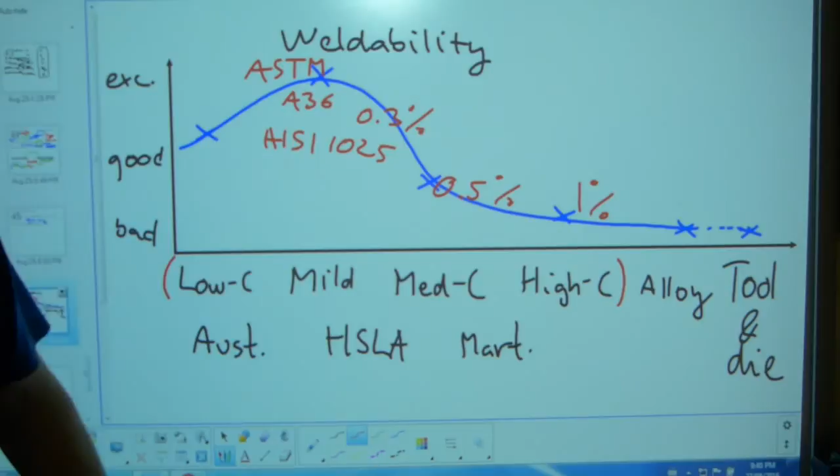Alright. High strength low alloy steels are here because they have a low carbon content, they also have a low alloy content, and they are here a little past the fantastically easily weldable, going into the downhill range where they are weldable with caution. But most other alloy steels, besides the low alloy, they are there for this reason.

Last remarks here: the Alaskan pipeline story is not so much weldability, but a little bit of welding technique mixed into it. Steel must be at the ideal temperature for the task considered. Some of the high strength low alloy steels were developed for cold service environments such as the Alaska pipeline, at negative 40 degrees Celsius or negative 40 degrees Fahrenheit, because it doesn't matter which scale it is. That number happens to be the same spot on both of those scales. So if you're welding pipe and the pipe goes through a thermal shock when the heat of the welding process hits it, that's going to be cracking everywhere, and that's not good.

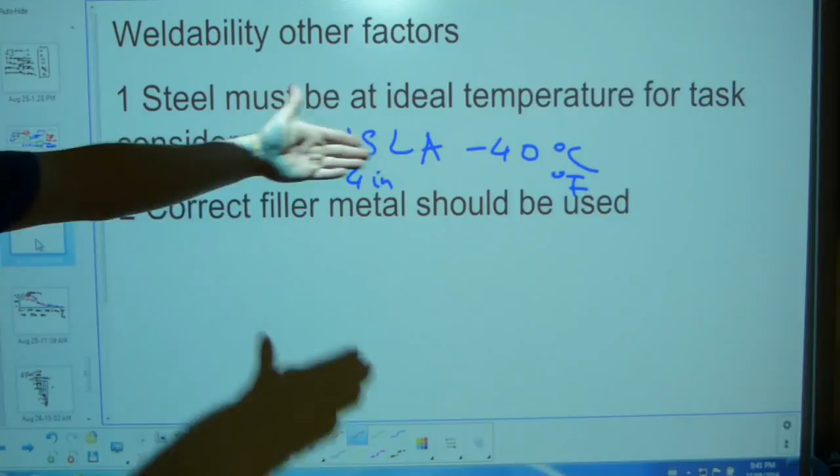That's why the room temperature or service temperature or environmental ambient air temperature affects weldability. But it's more welding technique. It should be taken into a room and should be welded at 50 degrees Fahrenheit or 10 degrees Celsius, you see. And especially if you have thick sections, anything like 4 inches thick steel, maybe not for pipelines but for tanks, not tank as in structure, but tank as in military equipment.

If you have thick stuff to weld, it's going to be such a heat sink that the heat affected area will expand so rapidly, and the cold area will dissipate that heat so quickly, it's going to crack everywhere. So that also affects this temperature consideration. It's also a factor that affects weldability. And it goes without saying, the correct filler metal should be used, so the filler metal should have at least the same strength as the metals being welded together. But again, we're back to cosmetic welding, that also works.